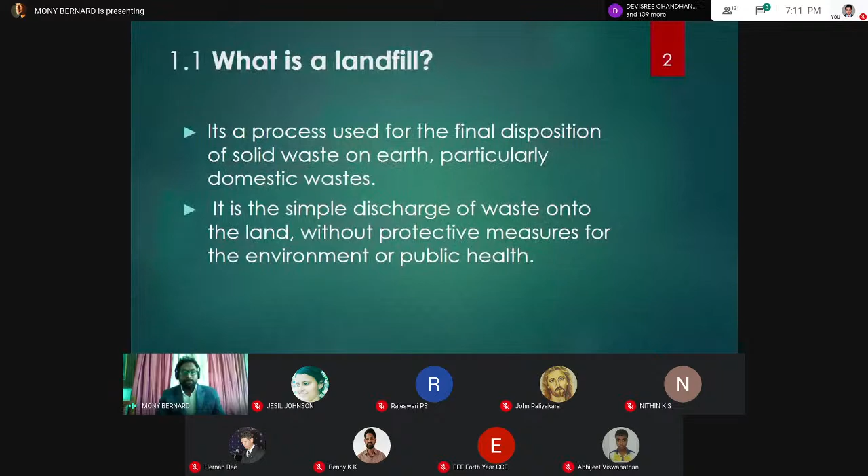A landfill and a sanitary landfill are somewhat different. A landfill is the final disposition of solid waste on earth, but with no much controlling measures. We can see a lot of places in India with a lot of waste; they don't know how to manage it, and it becomes fully a mess. This simple discharge of waste onto the land without protective measures will cause harmful environmental issues and health issues.

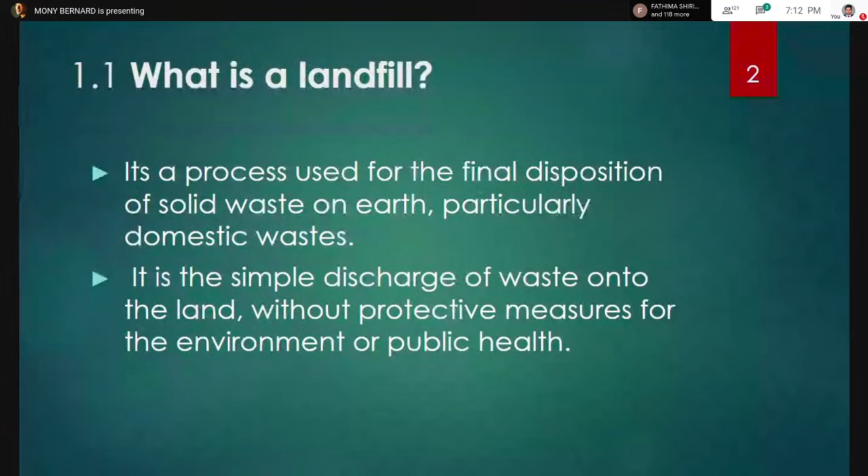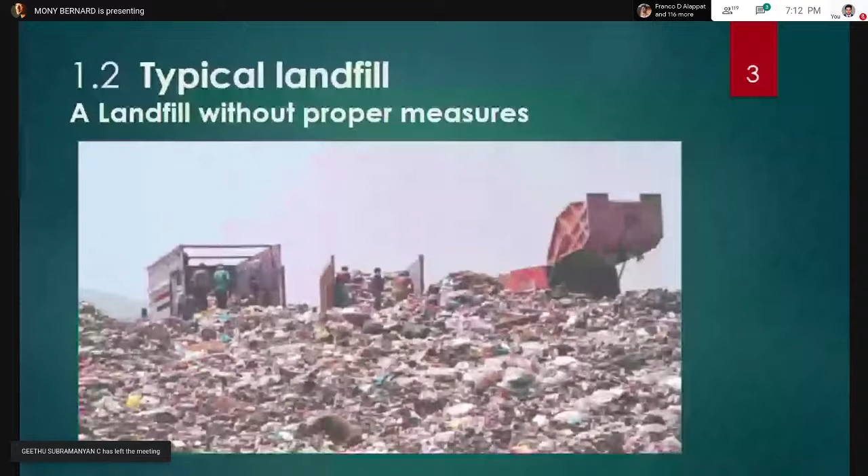What is a landfill and what is a sanitary landfill? A sanitary landfill technique is a clean solution for final disposition of urban as well as industrial solid waste, and it does not cause damage or risk to health. Moreover, it minimizes undesirable environmental impacts. It's based on engineering criteria and specific operational standards that allow the safe confinement of waste, preventing environmental contamination and protecting public health.

A sanitary landfill is totally based on engineering criteria, with proper coordination of three kinds of engineers: environmental engineer, civil engineer, and geotechnical engineer. It's a combined operation, and a lot of details come into this topic.

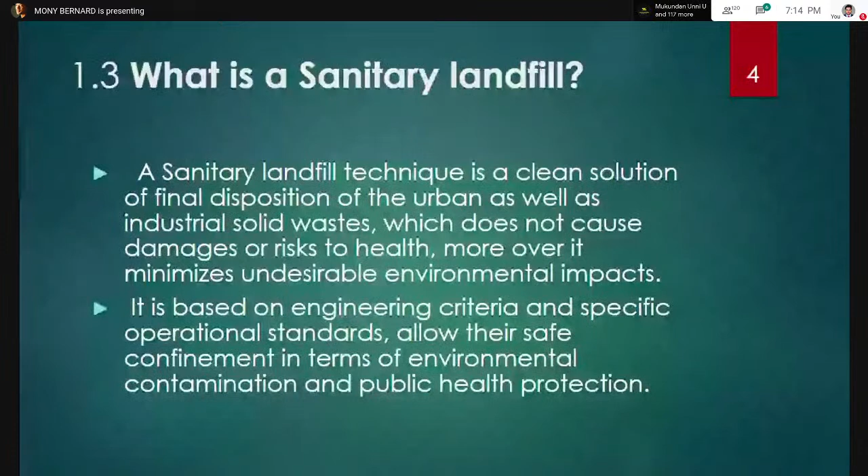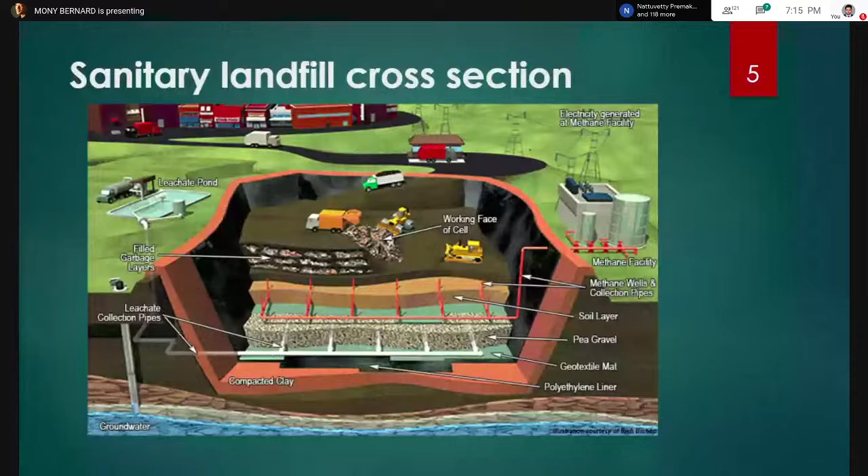You guys have to remember the transformation of a landfill into a sanitary landfill, and what kind of things we really need to consider while transforming a landfill into a sanitary landfill: technical guidelines, health problems, and environmental problems. These are two important things we can consider at this time, those that affect directly the public health and environment.

We need to protect our human health. First of all, when we consider a sanitary landfill, we need to consider the health problems, how we have to reduce all the health problems, and also the environmental problems, those that affect directly the environment or interact with public health. If there is any problem that affects our environment, that will affect ourselves too. So we need to reduce all these problems while we prepare to convert to a sanitary landfill. Sanitary problems.

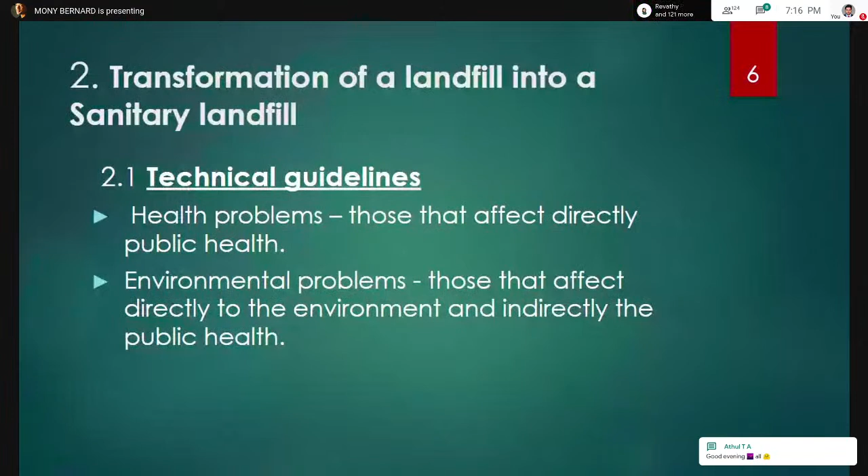Sanitary problems are based on how we make things healthy and how we manage sanitization, what kind of sanitization we adopt in this technology, movement and conformation of the mass of solid waste, eliminating fire and smoke, delimitation of area, and cleaning the general area.

We cannot distribute the waste to other places. We need to manage it in a specific place, and continuous checking is necessary because different kinds of waste occur over time, and to prevent fire and smoke that may exist, because in waste we can see a lot of different elements that may cause smoke or fire. There may be chances of this, right?

Delimitation of area means we are doing this in the landfill for a specific place. We need to choose the zone and make a certain space for the safest confinement of all this waste. So delimitation is very important.

Cleaning the general area: a landfill basically covers a huge area, maybe 50 acres, 60 acres, depending upon the size of the land. All the places inside the landfill and the surface places also need to be cleaned, and this is very important for safe operation.

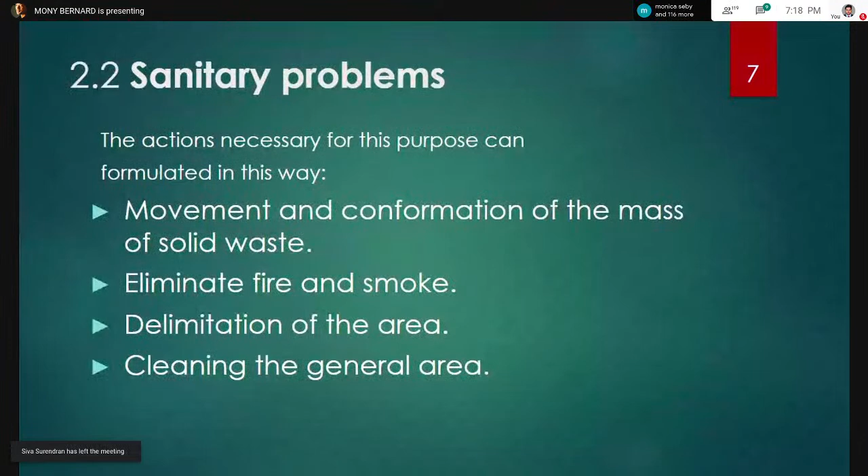Environmental problems: some environmental aspects here include surface drainage and separate percolated water leachate drainage. In a landfill, we need to consider this first point. We need to make sure there is a proper drainage system inside and outside the landfill area. Outside, we need a collection system of different pipes with proper drainage.

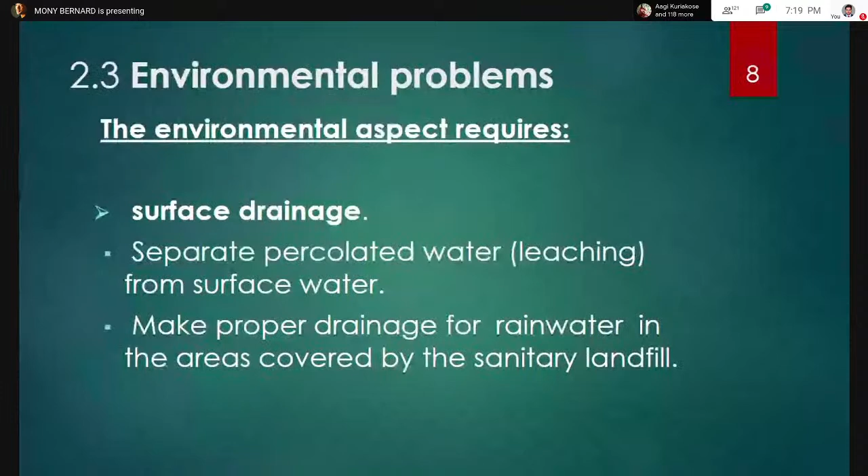Otherwise, when rain and rainfall occur, a huge amount of water comes into the landfill area, causing excess pressure, excess flooding, and water pressure inside the landfill. This can cause the breakdown of the landfill, which is very harmful. So we need a proper drainage system at the landfill site, both external and inside the landfill.

Inside the landfill, I will explain environmental problems further. Another environmental problem we can consider is that when waste is generated inside the landfill, it may cause a lot of gases due to microorganisms.

Microorganisms come into contact with the waste, and there is degeneration or decomposition of the waste, producing a lot of different gases, such as carbon dioxide, carbon monoxide, H2S, and methane gas.

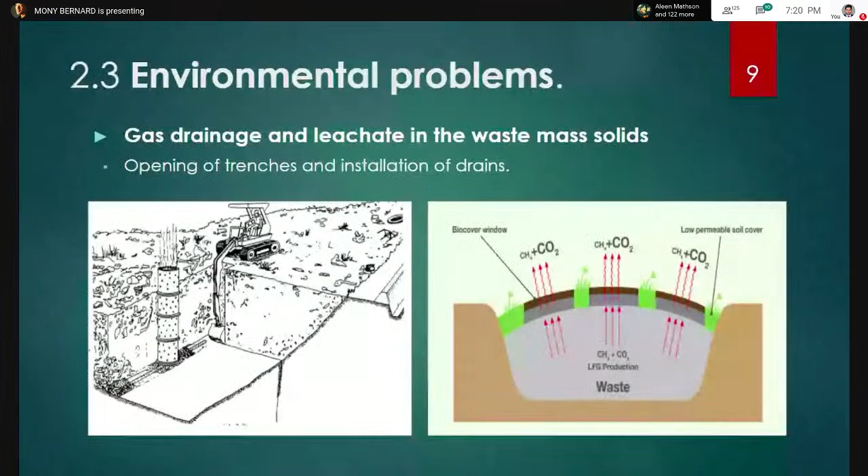We have some solutions for a sustainable form of energy by considering landfill management, and I will explain that part in the next slides.

Landfill gases are one of the most important things that occur, and this is part of our sustainable energy, because in a landfill we have to manage it properly. A landfill is a big project that may last around 20 years, maybe 15 years or more. Even when it's finalized, proper management is still needed for a landfill.

Landfill gases consist mainly of methane gas and carbon dioxide. We need to collect all these gases using pipes installed inside the landfill system, and these gases can be used for energy management, like the production of electricity.

This results from anaerobic decomposition. The gas starts occurring in the landfill due to anaerobic decomposition, which is a certain process of bacterial action by microorganisms. Anaerobic decomposition mainly has 4 steps: hydrolysis, acidogenesis, acetogenesis, and methanogenesis.

In the final stage, this process may produce methane. Methane is a gas we all know for our daily cooking process or something like that, but methane has a very harmful effect on our environment. It's a greenhouse gas, and it is 84 times more harmful than carbon dioxide.

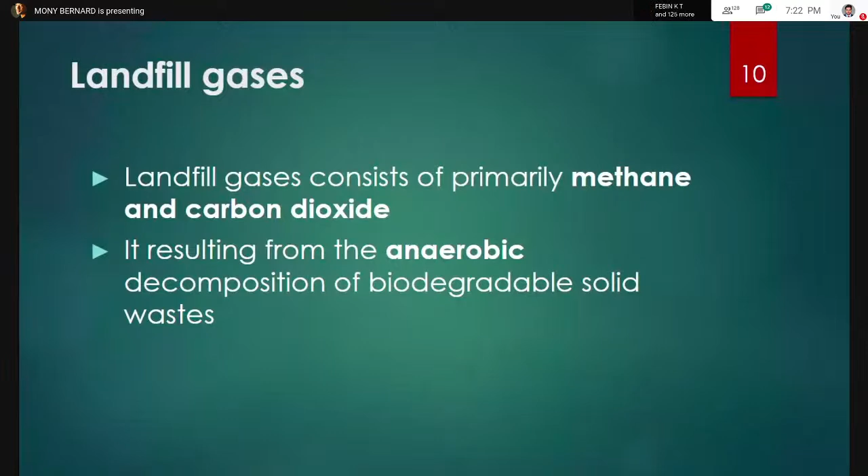But in bigger landfills, we can see all this methane, and we collect and use it for electricity production. A typical landfill gas collection system and energy plant works this way.

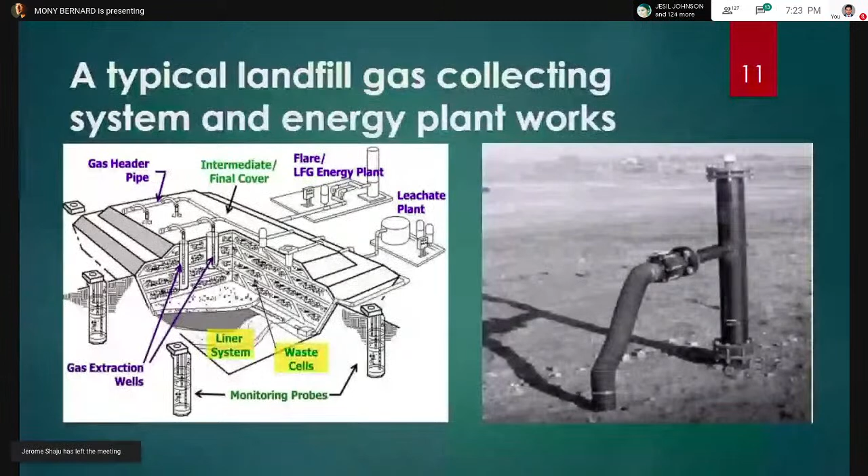And the right side picture is one of the gas pipes where we can control the gas and the flow of gas, etc. This is one of the monitoring systems. There is a proper adequate monitoring necessary for all the gas and etc.

Because when we construct a landfill, there is a lot of environmental problems, so we need to check every week or every month, etc. Thereby, there are monitoring gas wells, and there is a water exit, what we call a water monitoring system also. And the efficient engineers come every month or twice per month.

I know exactly if there is any problem or harm due to this landfill system, because at the front side of the landfill and the extreme end, we consider two monitoring systems to check if there is any problem inside the water tables of the landfill, because there occurs a lot of harmful leachate liquids. I will come to that point.

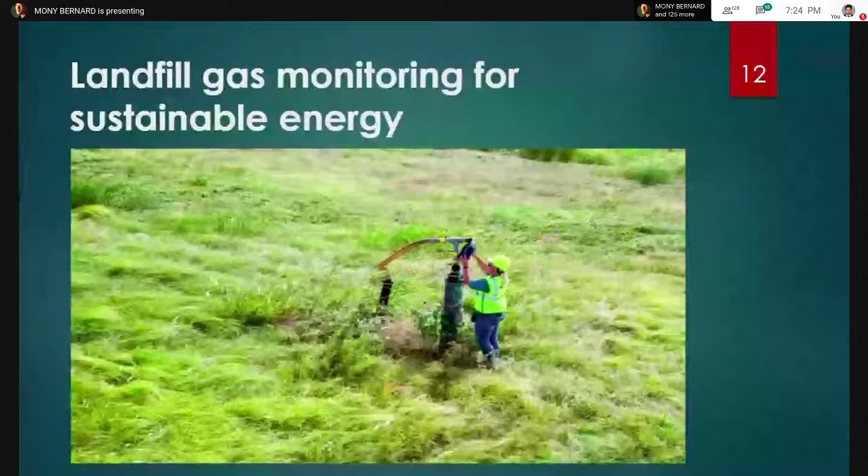Okay, environmental problems. What is leachate actually? Leachate is a liquid generated by decomposition of the waste due to microorganisms, due to infiltration of water. When it rains, a lot of water comes to the landfill base, and this is very contaminated water, dark color, and it has a somewhat higher BOD rate, and a great pH rate also. So it's particularly acidic, this water.

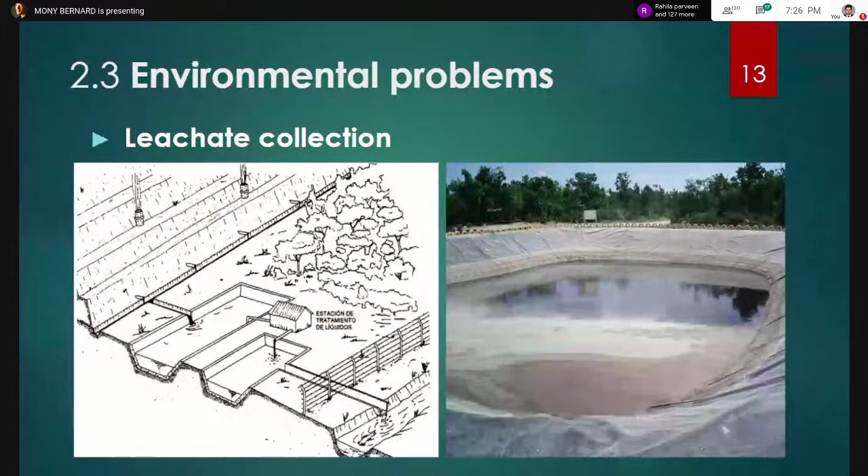And what is leachate? I already explained what is leachate. Leachate is a liquid generated by the decomposition of waste by microorganisms and due to the infiltration of rainwater. You all know the waste will decompose or degenerate due to the combined action of microorganisms. That's a grace actually in our environment. Without microorganisms, you can imagine how all this waste would go or end up.

And leachate can migrate into underlying water, resulting in contamination. This leached water is very harmful water, and if it has any permission to enter the groundwater or our ground, that will cause serious contamination to our environment.

Leachate can contain many different chemicals, depending on the composition of the solid waste. Most probably, we manage all this waste for urban waste and industrial waste. All are distinguished. It depends upon the landfill, and we have different landfill management areas for our urban part, or what we call the industrial part. It depends upon the landfill and management, etc.

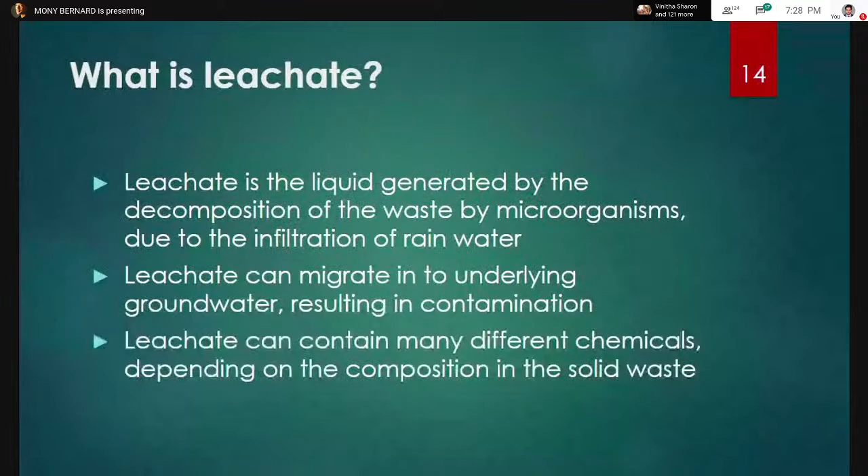When the wastewater, like leachate water, comes, it will ooze out by the action of gravitational force, and we can collect it. There are a lot of pipes at the base of the system, the primary pipes, which take down all this water, and it goes out through the action of secondary pipes. There are also a lot of submerged pumps underwater.

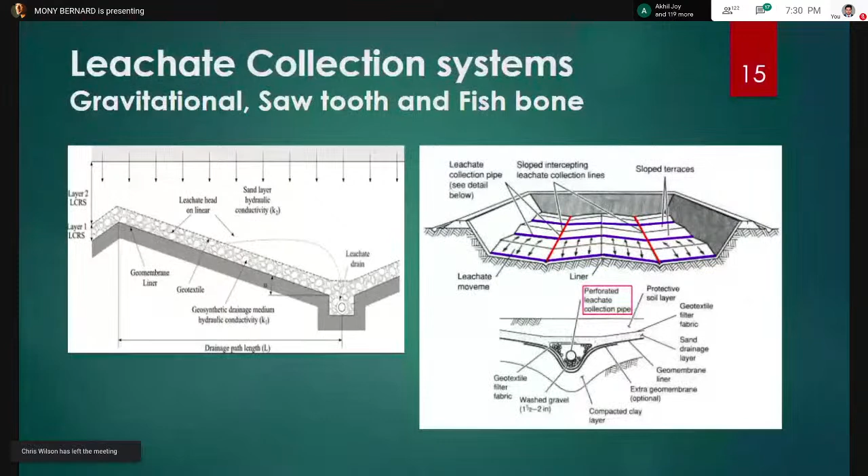This is the leachate collection system and how the plant works. It's a typical picture, we can identify how it works. When rain comes, a lot of leachate is produced, and these pipes work to take out all this leachate to the water treatment plant.

What exactly is the action of the water treatment plant? You guys know that, how the water treatment process works, a kind of chlorination and different processes. One of my friends who joined this class, Hernan B, is a professor and knows very well about that.

Project elaboration is mainly about remediation of the solid waste. The landfill is basically for remediation of solid waste, the transformation of the landfill into a sanitary landfill. These are the four steps we need to consider: remediation of the solid waste, transformation of the landfill into a sanitary landfill, operation of the sanitary landfill, and closure of the sanitary landfill. The operation is a combined project.

As I already mentioned, we need a lot of discussion before starting a project, because we need to consider all the environmental and health aspects, and how we have to tackle all these small details.

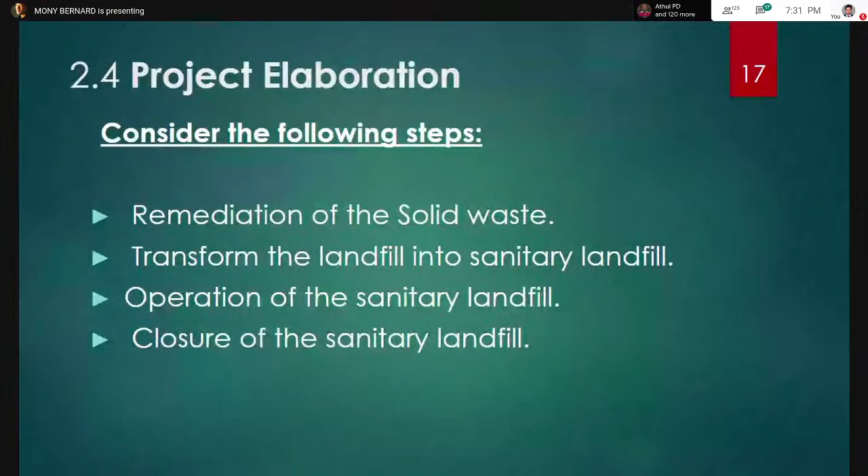Remediation of the landfill mainly means to discipline and regularize solid waste. We need complete discipline, it's a disciplinary action. We cannot do it in a messy way because there are a lot of equipment and human activities surrounding this landfill area. Because of this disciplinary point, we can see the formation of solid waste cells.

I will explain later exactly what a waste cell is, and the delimitation of the operation area, because in a landfill there is a limitation. We need machinery to confine all this waste in the proper manner.

Covering of solid waste cells is completed as a daily process. Maybe we will extend 10 meters or 20 meters, etc., depending upon the landfill and depending upon the trucks coming with waste. We have some daily operational standards, maybe 10 meters of advancement in length, and we operate on a daily basis with proper machinery and human disciplinary action.

For covering of solid waste cells, once we finish daily waste coverage and daily waste managing, there will come some 15 or 20 centimeters of a special kind of clay or soil, which we removed from the landfill, and we use that for covering each and every landfill cell.

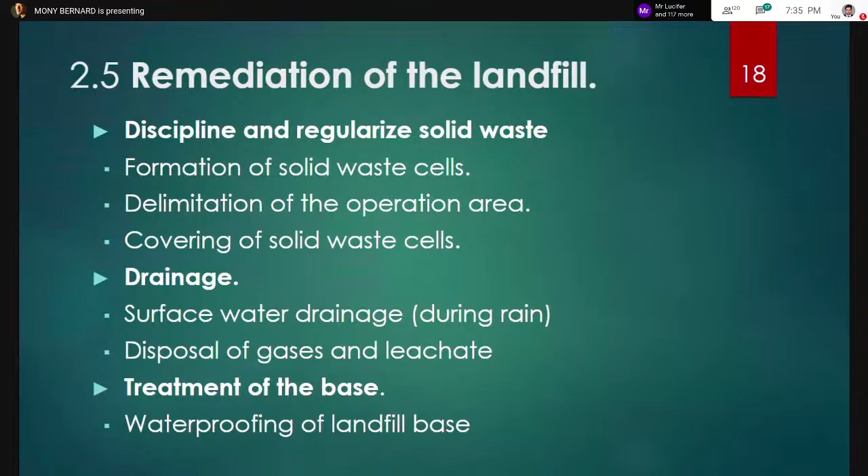This is the waterproofing system that comes around for a landfill, and in this picture we can see different layers. The base, we need to consider, like I'll explain one by one.

This is one of the projects I did in Surrey. Before constructing a landfill, we need a proper compaction of the land where we are constructing it. Compaction and geo bentonite, a special kind of clay used for compaction. This compaction is maybe 1 foot, 30 centimeters. 50 centimeters is okay, but in this project we actually used 60 centimeters of land to make it impermeable, a special kind of clay called geo bentonite.

This is one of the greatest things we have done. On the left side of the picture, you can see the geo bentonite clay, confined with compaction. This is a great protection - it's a primary protection, but we have a primary protection as well, and that becomes the secondary protection.

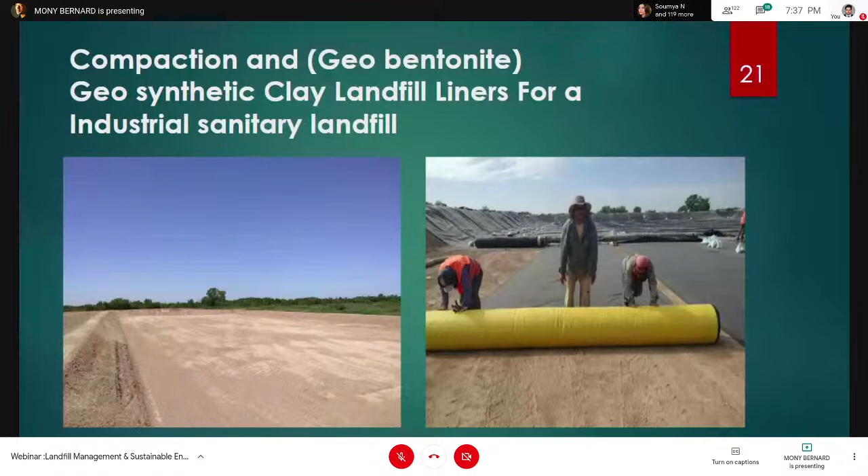Above this land we are constructing, we use geomat. Geomat is also a geo bentonite, and it acts like a bed, a cushion. Inside this yellow colored mat there is a geo bentonite layer, and when water comes into contact with this geo bentonite mat, it acts like a plug - it swells and acts like a cement structure or something like that. So there is no way for water to come inside, and this becomes another layer of protection.

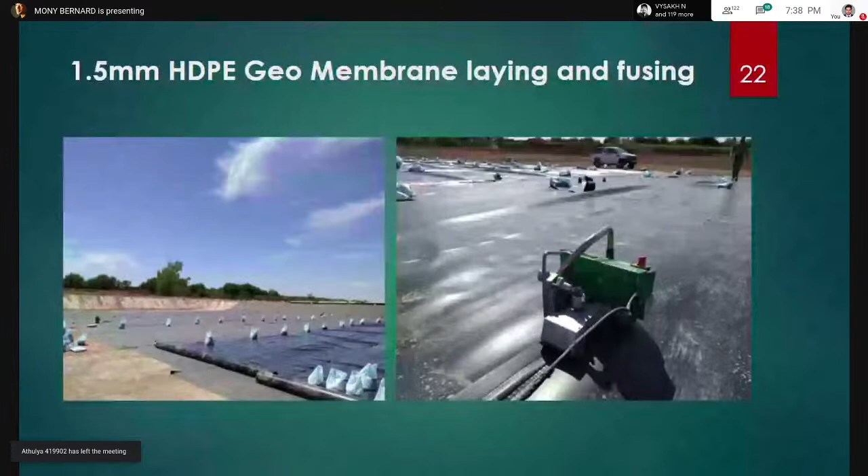And this is what we call HDPE, high density polyethylene. It's a geomembrane, a plastic, but not a normal plastic - it's high density and gives higher protection. In the right side of the picture there is a welding machine, a geo bentonite HDPE high density polyethylene welding machine, used for a high fusion technique, a high temperature process, to create a single coverage at the base of the land.

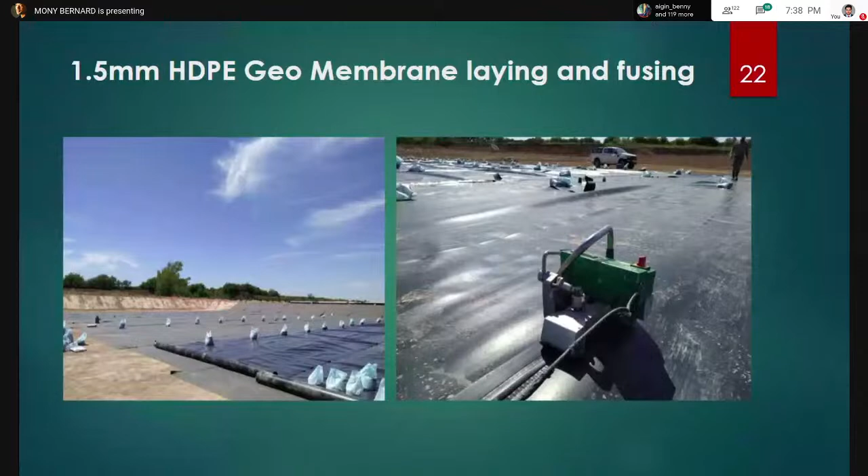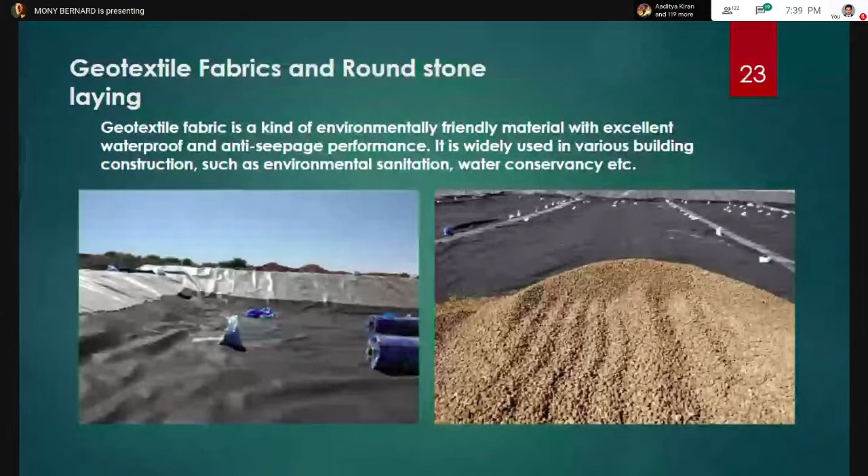Above that comes geotextile. Geotextile is a fabric that will allow all the leached water to flow very smoothly to the base. This is also HDPE, high density polyethylene, a fabric, cloth-like, and it also needs proper welding with the temperature fusion technique. Above that come round stones, which act as a filtering layer so that all the leached water comes very easily to the base of the landfill through these round stones.

Transformation of the landfill into sanitary landfill - access. We are not only considering the landfill area itself; we have an entire structure. This is a combined project. There are a lot of different things that come into a landfill, because a lot of different trucks from the urban area come with waste, and there is an entrance.

There is an entrance, a security area, and a balance - a weighing machine. When the truck comes, they have a specific manifestation for what kind of waste it is and where it will go, and the truck is allowed for this particular landfill only after checking for permission. Once it gets permission, there's a laboratory near the installation area, and there is an engineering department also.

The laboratory technician takes out samples of the waste to determine what kind of waste it is, based on the manifestation of what kind of waste is going to be managed. We don't allow dangerous waste, like batteries, e-waste, paints, solvents, etc. After permission, they have to manage it - there is a proper base, a proper passage already constructed, to manage it in a safety manner without any disturbance inside.

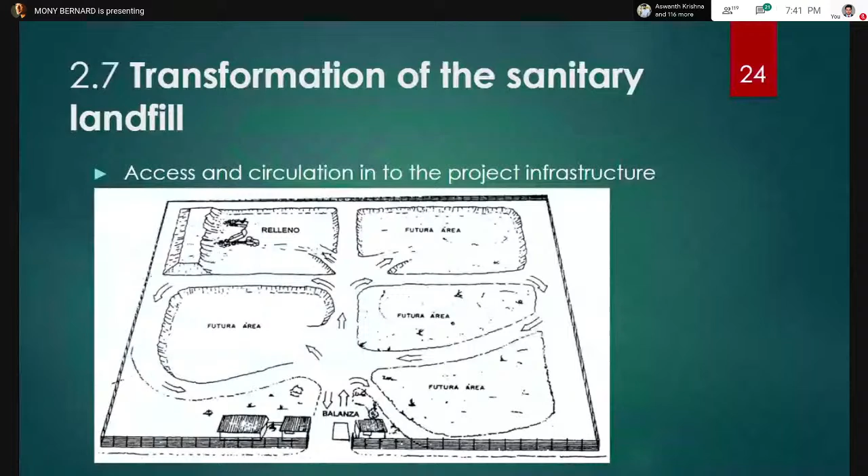Sanitary landfill transformation involves geometric design for the formation of the cells, quarrying projects, project operation daily and monthly, and preparation of the proper surface treatment for the filling cover. I already mentioned these things.

In this slide, we can see that the geometric design of the landfill is very important. We cannot operate a landfill in a place very close to population because we need to consider both human health and environment. So we need to particularly select a landfill site, a little apart from the population, through a combined study by geotechnical, civil, and environmental engineers who check all the elements of the landfill and whether problems will arise in nearby places. We need to construct a landfill apart from an airport and human population by a particular distance.

And all these things determine how the project operation must be carried out daily and monthly: sanitary landfill operation, and preparation of the proper surface treatment of the filling cover. It's a basic thing actually.

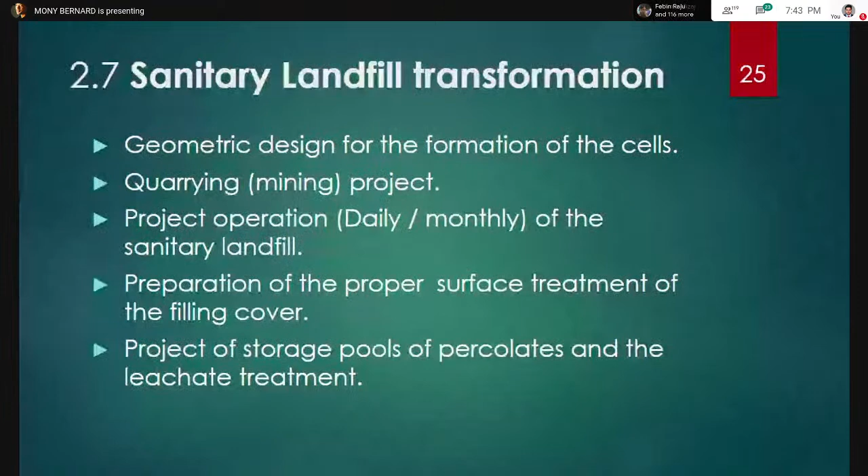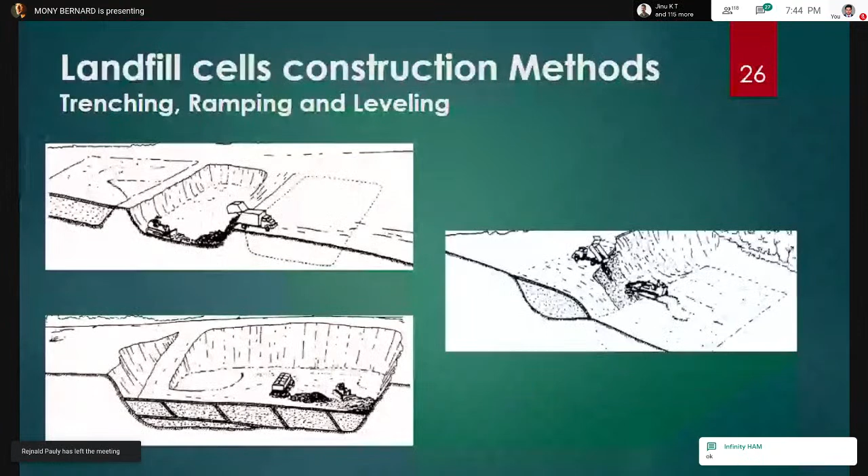The second is ramping. Proper ramping is very important, because without it, there may be dislocation of the waste, and in the future it may cause a blast or similar issue. And proper leveling, which I already explained, is important for the safety confinement of the base of the landfill, and proper layering, etc. I'll explain the liners then.

Then there come some rodent problems, like rats, or some bird problems. Migratory birds will come there, and that will cause serious damage, also a problem to humans.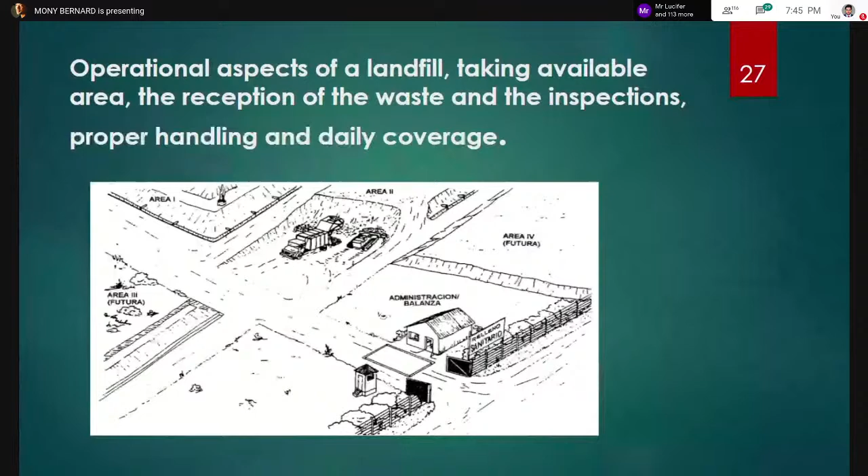And this is what we consider about this situation: sanitary landfill transformation, recovery project, burning gas and biogas storage, monitoring project, and complementary technical and environmental work. The recovery project is the sustainable part I already discussed, like the gases. Some landfills use a methane gas burn system, like a flare, but they may not produce sufficient methane to generate electricity. So for biogas storage, in a bigger landfill they will store the biogas, the methane gas.

The monitoring project covers geometric, geotechnical, and environmental aspects. Monitoring is very important because we have to monitor gas and leachate water, since both affect the environment. So we have proper monitoring wells at the base, at the surface of the landfill, and at the end of the landfill. The water flow is very evident; we need to consider the flow of water and any possibility of water coming into contact with the surface of the landfill and the water table inside. So we need proper investigations adequately, and engineers actually monitor these things, the gas and the water wells, etc.

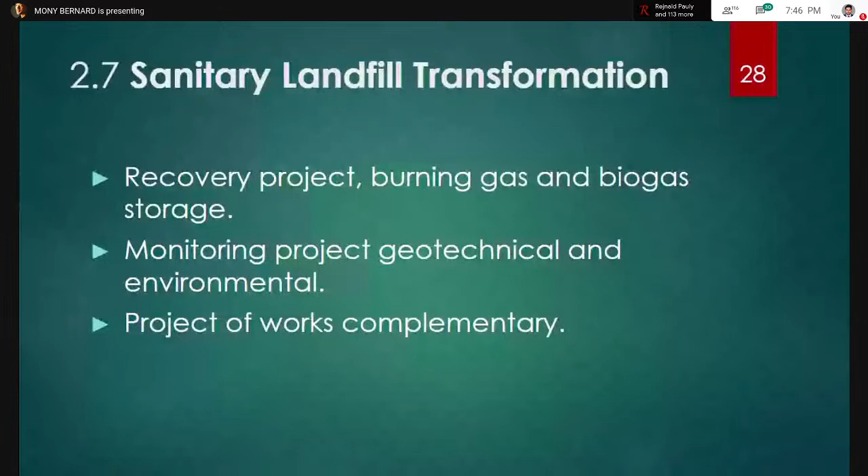Sanitary landfill operating procedures: reception must be done at the entrance of the landfill. There are some procedures I have to operate. A landfill has proper procedures. There is an entrance, and the reception must check the kind of waste, etc., and the details of the trucks. The truck must be weighed using a weighing machine, to check how much waste is inside each truck, and the truck must be inspected.

The truck must be inspected, and a sample must be taken out for the laboratory technician for studies - to check if this is any kind of harmful to the environment, etc. Then optimization of human, material, and existing financials.

That comes for the elaboration of the project, what kind of cost will come, etc., form of resource utilization. When a landfill is under construction, we need to remove a lot of things, and maybe a part of the environment we need to reconstruct. We need to remove a huge amount of land and soil, which we can reutilize for the cells, maybe the covering layer of the cells, etc.

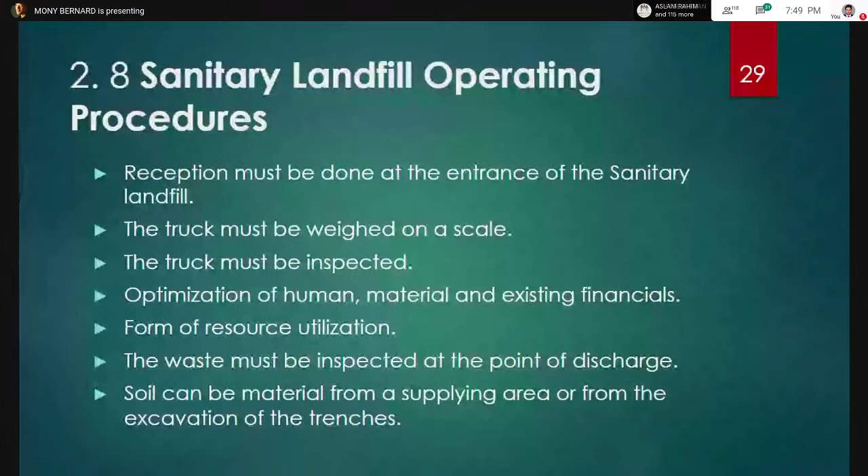Zoning of the disposal area of the waste according to its characteristics - we can zone the waste and prepare different landfills. We need to construct a landfill with less environmental pollution and fewer problems for both humans and the environment. So zoning is very important according to the characteristics, and we can construct industrial waste in different places from domestic waste, etc., with different landfill ports constructed like that.

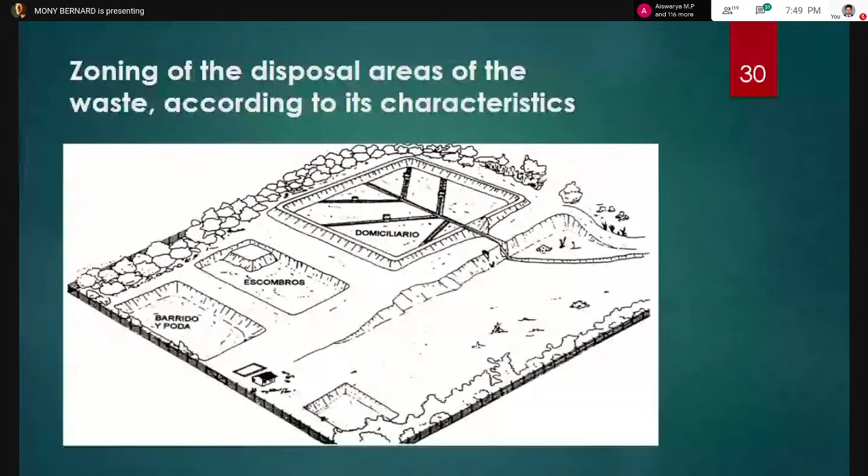And closing and sealing of the landfill - proper closing is very important because on a daily basis we put all this waste in a particular 10 meter, 15 meter layer, and we need proper coverage of the waste by closing the landfill on a daily basis.

Geotechnical and environmental monitoring, final coverage, gas treatment and percolation, and periodic site inspection. Periodic site inspection is very important, because in each area there is a supervisor who does inspections, maintenance, and service for installed equipment and accessories. There may be a lot of different equipment needed, like compaction of the waste, and how to manage it properly - otherwise it will cause a serious problem.

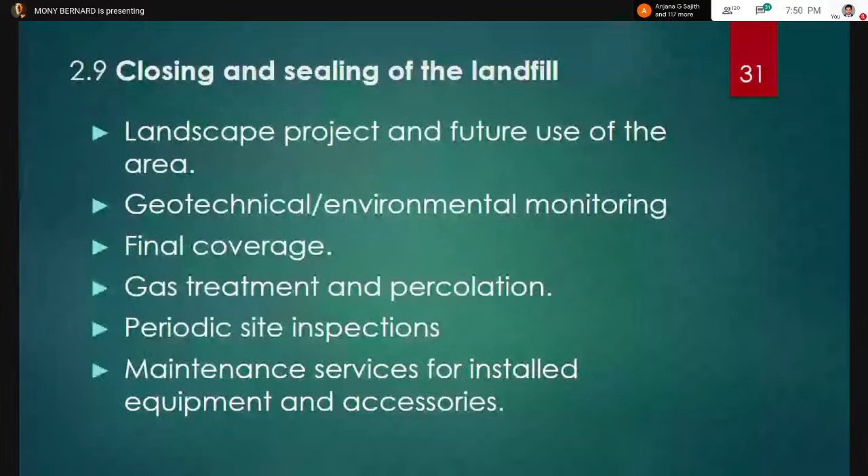So we need monitoring of the mass behavior of a sanitary landfill, closing and sealing according to the project. You have to see how it comes gradually in a landfill with a proper idea - the different cells and how they are actually packed with covering materials, etc. And there is perforation of a gas well, a flame, a flare, and a fire, etc.

You can see there are a lot of different spots - those are monitoring spots where we can monitor the gas level and the leachate, etc. There are different flares depending upon the size of the landfill. In some landfills, all these gases can be collected to prepare sustainable energy, like electrical energy, from the gas.

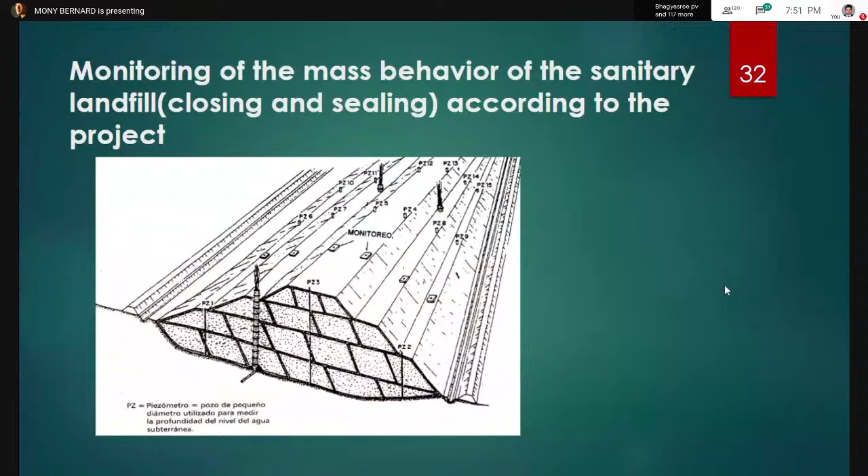This is one of the landfills with some aesthetic ideas. When we consider a landfill, we have a final idea of how to reuse that place, and we can make different ideas like a playground, because it's very nature-friendly - we are actually reconstructing nature in that place also. So we have to plan and we need proper maintenance. It's very important, and we can reconstruct like a football ground, as in the left side of this picture.

You can see that - one example is Tel Aviv, which transformed into the world's largest recycling facility. That's a landfill area they reconstructed like a park, and it's very interesting.

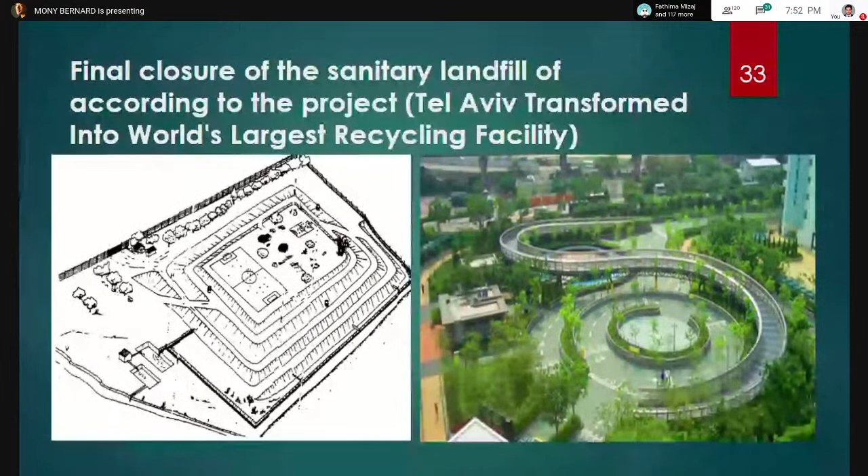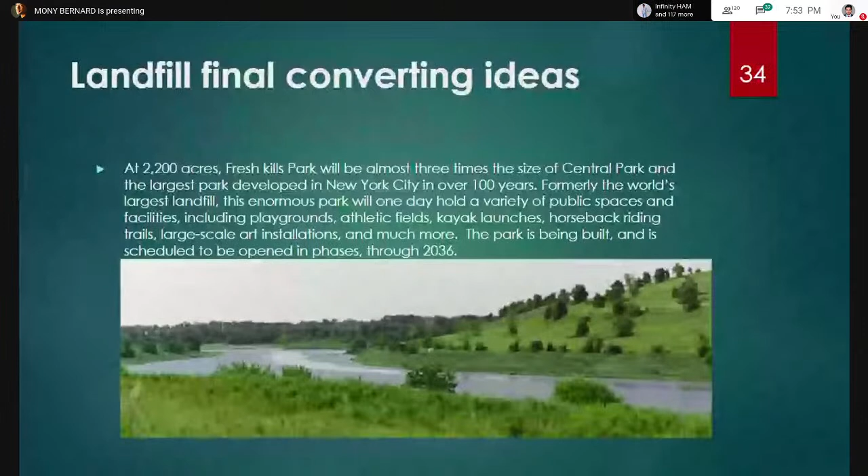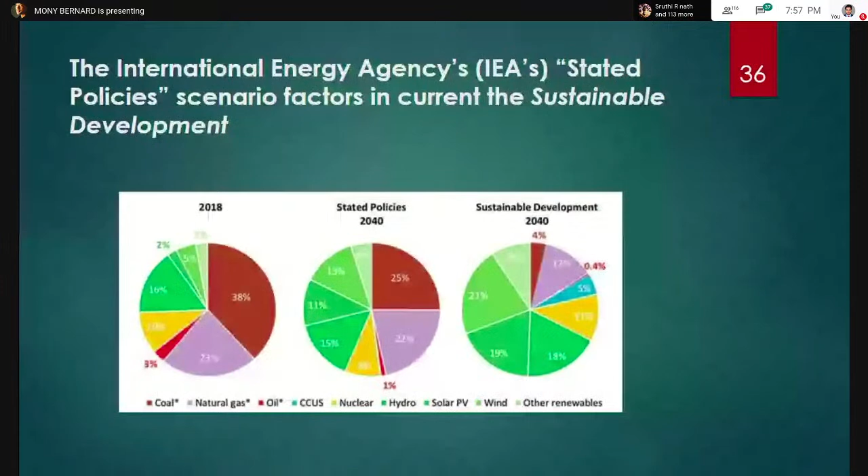Advantages of landfill: it's cheaper, a very cheap alternative, low capital investment, a complete and definite method near the urban area. It recovers the land, works in a short time, generates jobs, and generates energy. You can see all these advantages, and it's very beneficial.

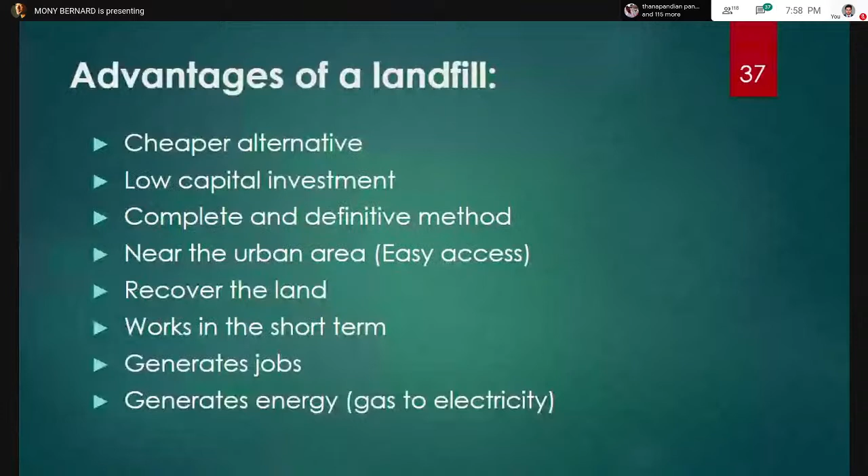In Kerala, it's very important, like a landfill, because we don't know how to manage it - I'm also part of society, so I can say that. But in different countries like Europe, the States, and South America, we can see different kinds of landfills. I think we have some landfills out there in India, but sometimes the operation is somewhat not satisfactory.

The disadvantages of the sanitary landfill: acquisition of land. It's a small disadvantage - you can see acquisition of land. Maybe we need a huge piece of land without any cost and trouble to the human and environment.

The construction and supervision, construction, operation, post-closure surveillance, a risk of transformation into the landfill - there is some risk actually in the earth. We have to remove a huge amount of soil, and it depends upon the place, and it may cause some damage or problem to our environment.

Possible water pollution - it might cause a possibility. We have to prevent it with impermeable layers. We are actually using different layers, like already I told you, primary and secondary impermeable layers. But in some cases, if we don't practice all these layers, it may cause serious water pollution and air pollution.

Maybe while operating, if you don't arrange all this waste in a proper manner, it may cause air pollution, some debris, some particulate matters, etc. That comes to cause a little bit of problems. And why sanitary landfill is important - it's about problems and improvements. It's very important actually.

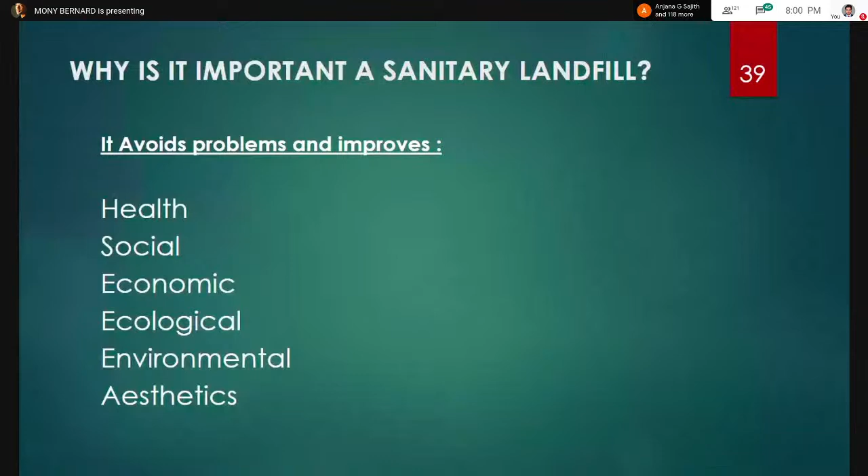We can consider our health and social, economic, ecological, environmental, and aesthetic aspects. I already covered a complete picture about landfills, how they help in health, and how they are important to social, economic, ecological, environmental, and aesthetic factors. For the final recuperation of the landfill, we have to reconstruct it in the form of recreational parks, etc.

Planning and design of a sanitary landfill: selection of area and planning, how we have to plan and design a sanitary landfill. Selection of area is very important. The area will be analyzed through a combination of engineers - a geotechnical engineer will select the area and a study will occur for a long time, maybe costing 6 months or so.

Collection of information for the project. We have to collect all this information: how to build the process, the engineering side of the project, the general concept, the executive project of the landfill, and cost. It might need some cost - it's costly for the first concept phase, but for particular years afterward it will not cost much.

Environmental impact assessment studies - an environmental engineer will carry out all these impact assessment studies, and I did this job also.

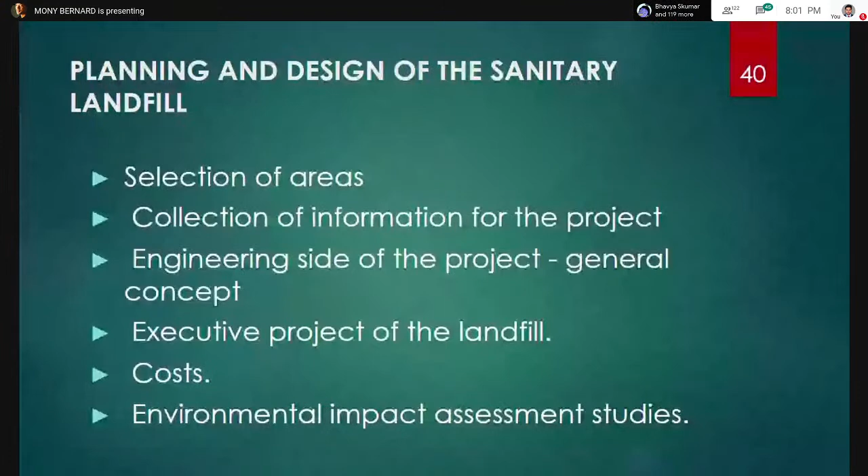Plan of operation - mainly how we have to operate a landfill. We need to consider delimitation of spaces, so construction of cells. We construct small cells for each and every waste, so we can use all the space in a very proper manner with little space arrangements, etc. I will explain this more specifically later.

Area, trench, ramp, covering material - we can get all this covering material from the landfill itself, because we remove a huge amount of soil, so we can reuse that soil as covering material.

Technology and control - we need some kind of technologies for volume of garbage, land, leachate, and gases. We need to control all these things with technology.

The maintenance of machines and equipment - we need proper machinery to maintain facilities, monitoring, and treatment of effluents. We need proper treatment in any landfill. It's very evident that we need a water treatment plant, and we need adequate monitoring, which is very important in case there's any chance of harming our environment, etc.

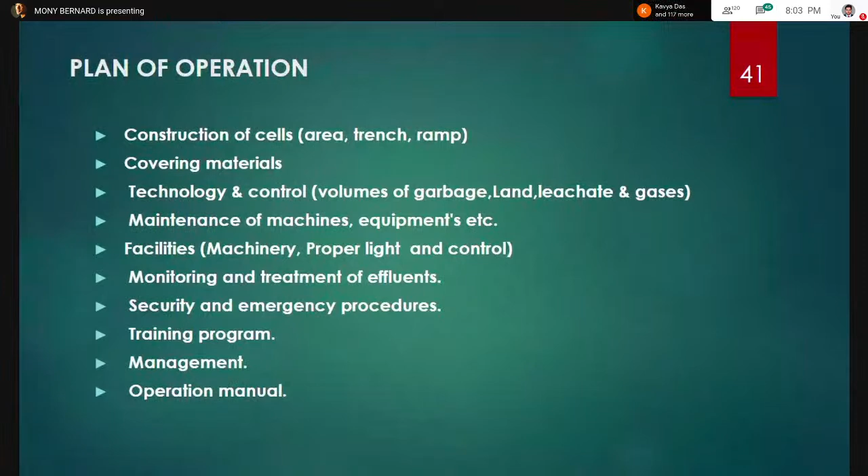Security and emergency procedures - proper security is needed because in some landfills there have been dead bodies or parts of bodies found. That causes another problem if a truck hides these things and dumps them. So we need to check out the landfill with proper monitoring and a training program. The people who manage operations have procedures for how to operate inside the landfill, and they are trained - this is a training program where we give them a management and operational manual. This manual is important to operate all these things, etc.

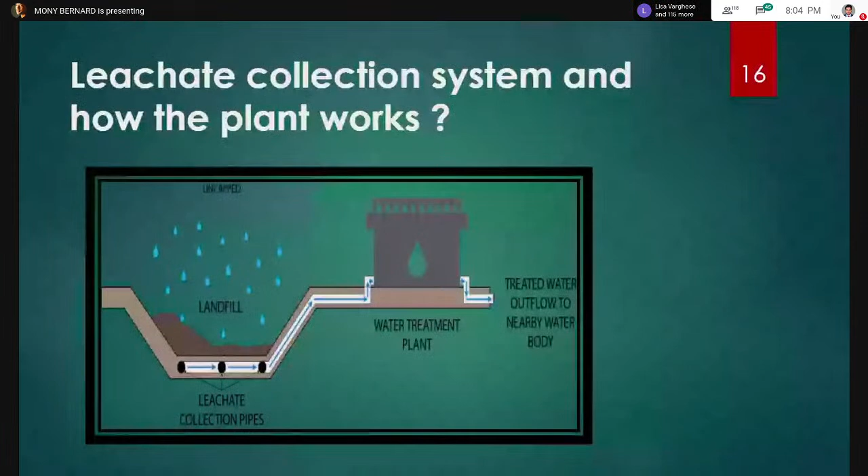Quality control is very important. We need to control every part while constructing a landfill, with monitoring of the different liner layers - we have proper procedures for this. I didn't explain much about this liner before, but it is very important, as I already explained I think.

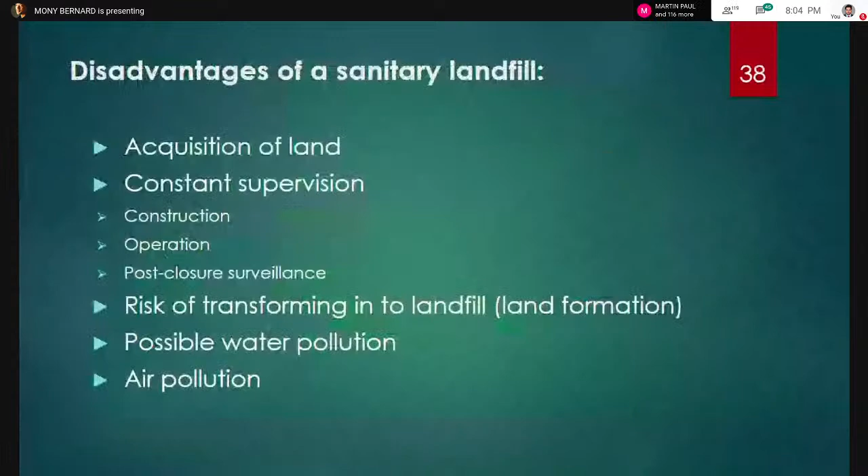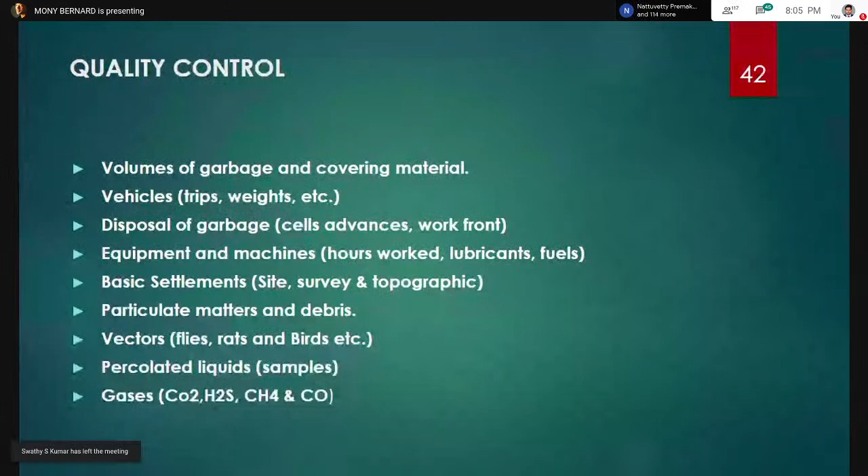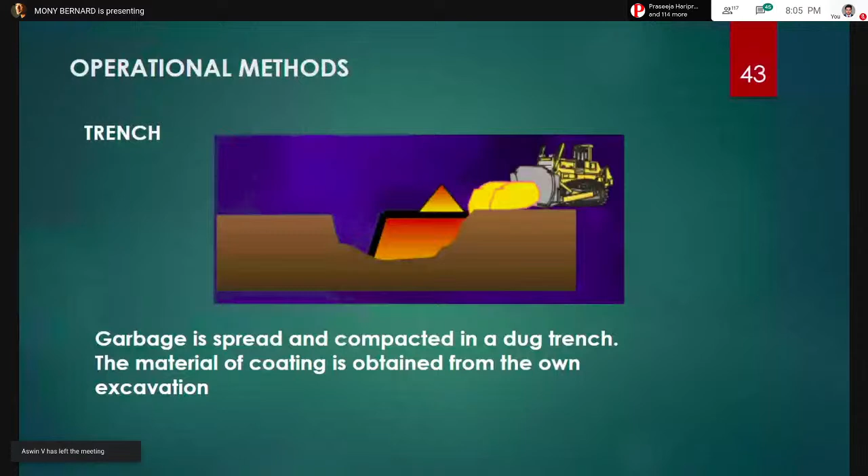This is operational procedures - how we construct the landfill base, we need a method, and the methodology we use is trenching. First we prepare the trench and manage construction. You can see the orange sheet is a cell - a particular waste cell as we call it. The dark portion over the cell is called covering material, and this way we construct each and every cell.

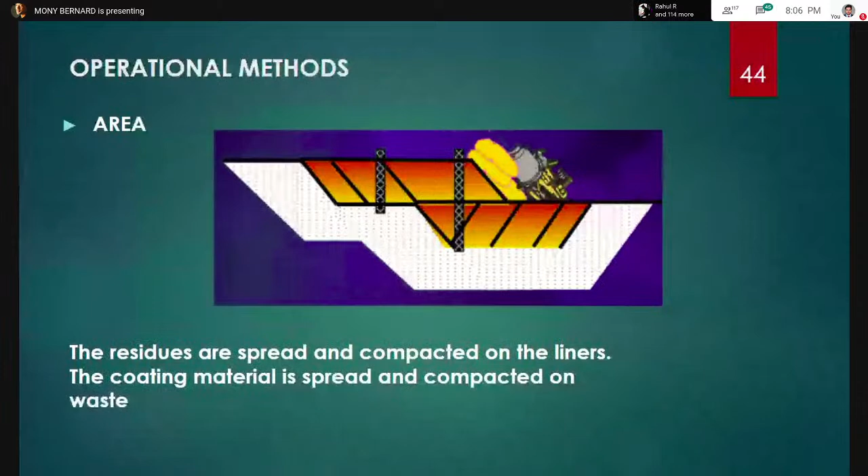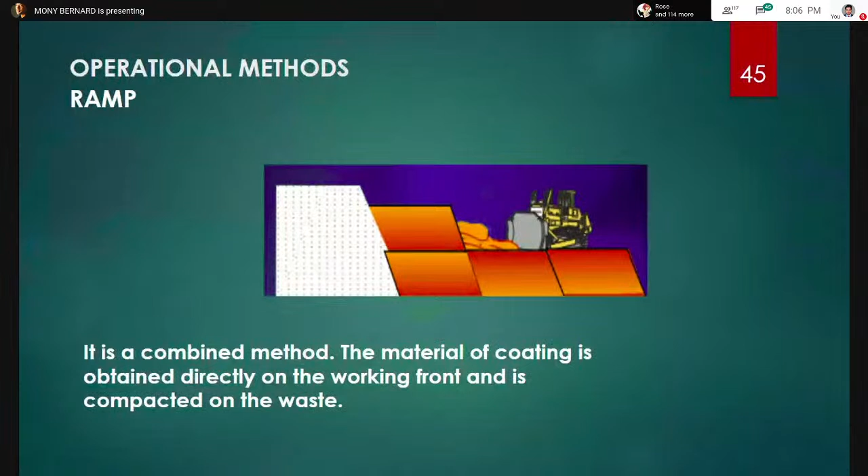There will be monitoring, like the gas monitoring system you can see, with proper pipelines, etc., constructed in different parts of the landfill. This is a ramping section - there's a small ramp constructed because it lets us easily pack up all the waste into the landfill in a very confined way, etc.

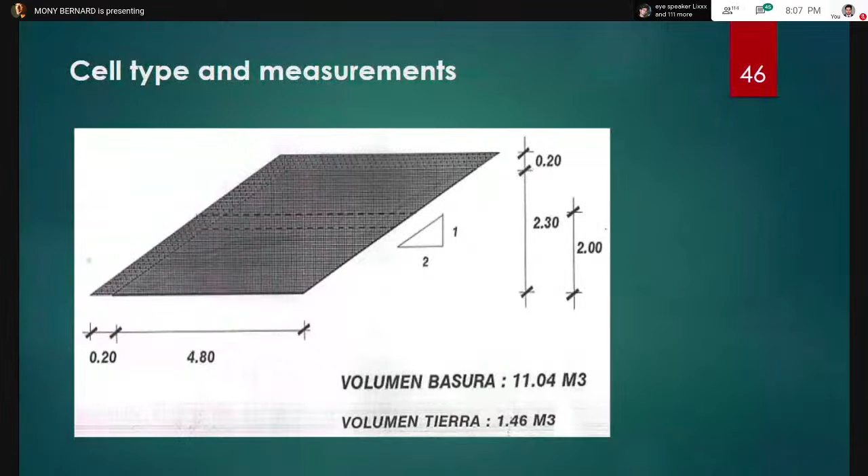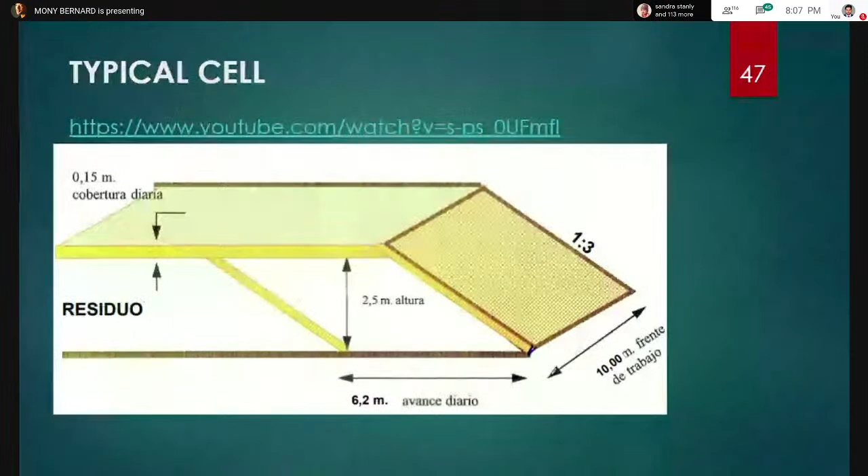The advancement of the landfill daily becomes 4.80 meter. It depends—maybe the next picture you can see 6.2 meter, and the height is 2.5. It includes the covering material also, 2.3 plus 0.2 meter for the covering material, and the working front of the cell is 10 meter, etc. And this is a final structure.

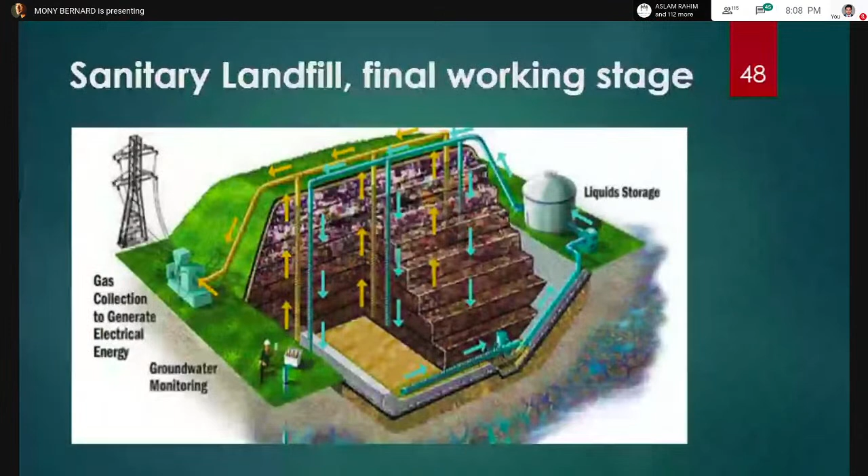And I would like to summarize this for the resume of this video, what I'm working on in the real environment—how we have to manage the waste, like a landfill, and sustainable energy. You can see in this link.

I think I will try to open it if I can. Somebody who helped me, I think so. Okay, I will.

Can I stop this? This is the final, but after the final we can go to the next presentation.

Improving access to resources while preserving and replenishing those resources is what we do at Veolia. Each day we manage landfill sites for non-hazardous waste as they produce. By transforming this biogas into electricity and heat, we turn waste into a significant source of renewable energy.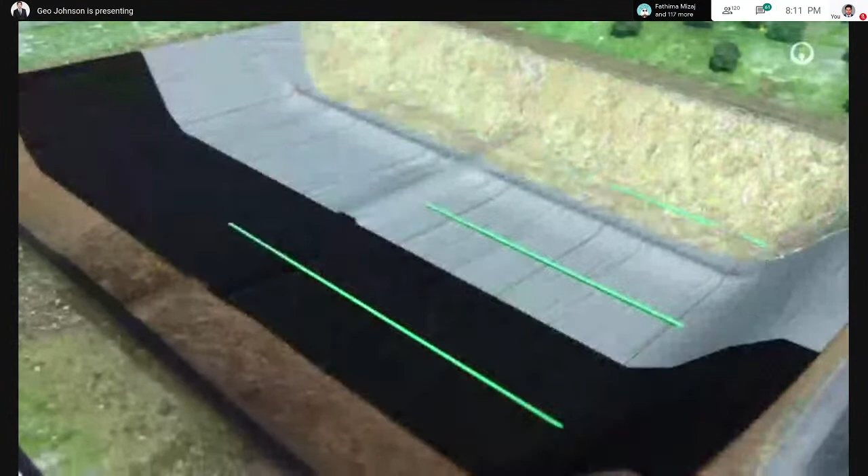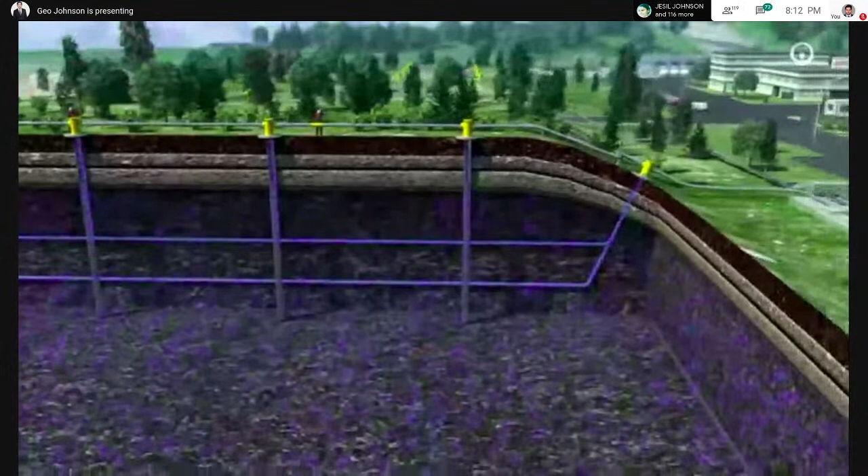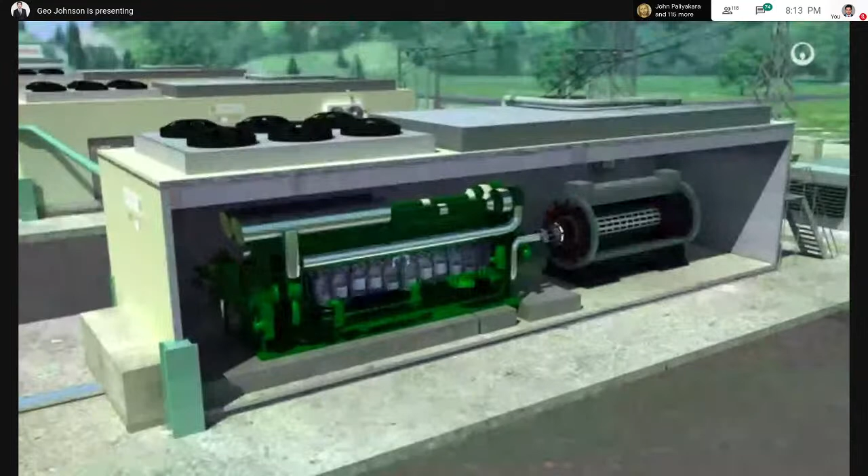Improving access to resources while preserving and replenishing those resources is what we do at Veolia. Each day we manage landfill sites for non-hazardous waste and collect the biogas they produce. By transforming this biogas into electricity and heat, we turn waste into a significant source of renewable energy. Here's how and why, at a glance. Household and industrial waste that is not recycled or recovered elsewhere is brought to landfill sites by truck. The waste is weighed and checked to make sure it is not dangerous in any way. It is then taken to a landfill cell. The design and location of these cells are thoroughly studied beforehand to make sure the environment is protected. Depending on the nature of the ground, the base and sides of each cell may be reinforced with an impermeable mineral layer. Then the cell is lined with watertight membranes to keep the waste mass contained. Waste is deposited in a cell in operation, then spread out and compacted. This operation is repeated, so the layers become increasingly dense as they accumulate. The rainwater that percolates through the waste forms a liquid known as leachate, which is drained off and treated. After a cell is filled to capacity, it is closed and covered with a layer of soil that blends into its natural surroundings. The cell's environmental impact is monitored for several decades. Inside the airtight cell, an absence of oxygen causes the organic waste materials to ferment, a natural process that creates a large buildup of biogas, made up of a mixture of methane, carbon dioxide, nitrogen, and oxygen. This biogas is captured by a network of vertical and horizontal wells. It can then be used in a local industrial process or conveyed to a cogeneration plant. Next, the biogas is purified before being burned to fuel combustion engines. The combustion heat pushes a set of pistons, which in turn drive an alternator. This alternator produces electricity. Some is used on site and the rest is delivered to the high-voltage national grid. Residual heat from combustion can be transferred by heat exchanger to a nearby district heating network or to an industrial or agricultural facility. Capturing and utilizing biogas from landfill waste means less methane is released into the atmosphere, so it contributes to combating climate change as well as preserving resources.

Okay, I just go back to the presentation.